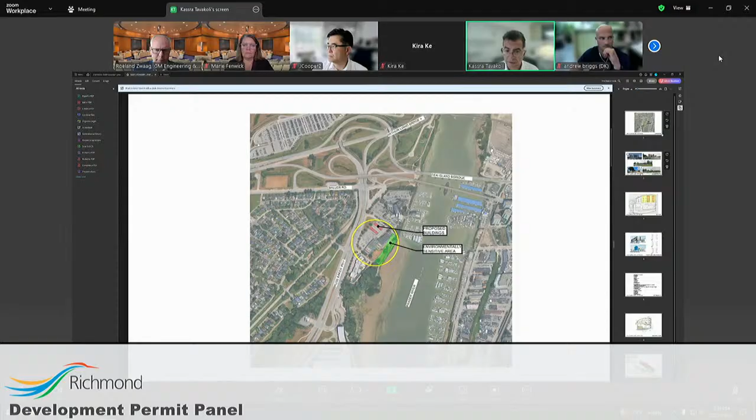So with that, I'm going to the next slide, which shows the context. To the north, you can see at the very top left, an older hotel, a 10-story building in the marina, almost the same era, a little bit older than our building.

To the south is the slide showing the big image on the top right, which is a newer building—a 3-story fitness building with offices, an autism center, daycare facilities, and some parking in front. The center image shows the existing building on our site, a stepping 5-story modern building, and shows the vast parking.

The other thing to notice about this area is that this parking is underused, and studies we'll talk about later show that parking is fairly underused, creating the opportunity to take this area in the middle for a new building.

To the east of the site is the Fraser River and its banking. Most of what's shown in the bottom left image is the environmentally sensitive area, with a public pathway that's continuous between the neighboring buildings, and a future dike running along here, which the trees indicate the location of.

The bottom right image shows the context to the west, which is Russ Baker Way, heavily trafficked, and across from that, hardly visible because of the trees, is the Burkeville neighborhood, which is single families.

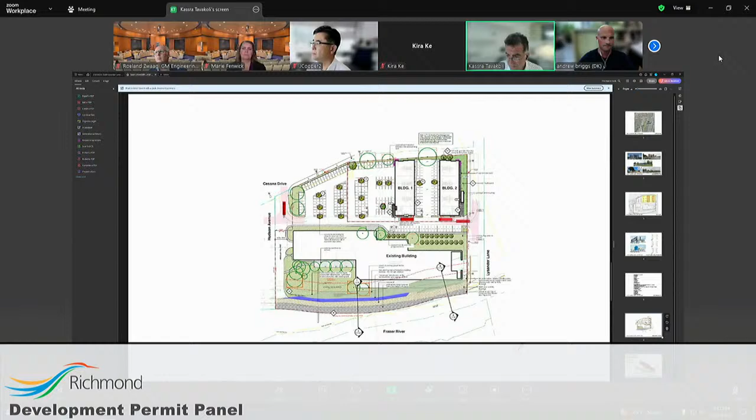Hi everyone, my name is Thibaut Doua with ROE Environmental. I'll walk you through the environmental assessment. What you're seeing in the green hatch box is the environmentally sensitive area associated with the Fraser River shoreline. That's about 60 meters total, 30 meters on either side of the natural boundary of the Fraser River.

What you're seeing in pink is the area of the dike that will not be restored. It's going to stay as riprap because you can't have any planting there. And in gray is the multi-use path. The existing habitat in the area is mainly a maintained lawn with a few remaining planted trees, so there's not really any good riparian habitat that was present to begin with.

In terms of species present and species at risk, we didn't identify any potential species at risk that could frequent the area either during or following construction of the dike. We did a review on site for the potential presence of bald eagle nests, which is a major thing we need to consider, and the closest one is over 130 meters away, so there wouldn't be any potential for disturbance during construction.

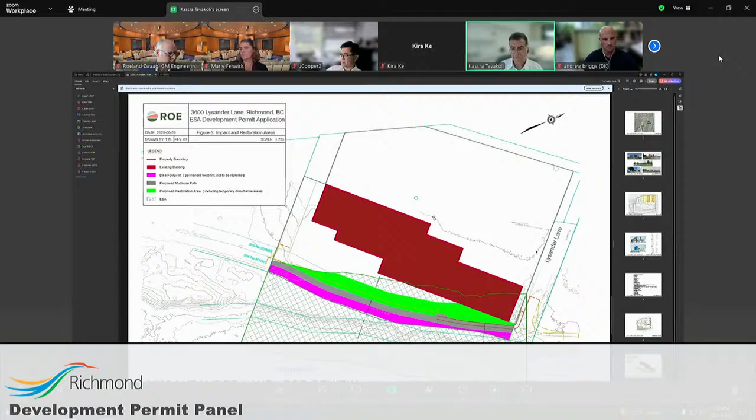In terms of subdivision, there's no real impact on the environment for the lot that's to the north, because it's currently just developed. That's all I have for this environmental slide.

Good afternoon, everyone. My name is Aaron Chen, the traffic consultant for this development. We conducted a traffic impact assessment to this proposed development.

Due to the estimated traffic volume generated from the proposed development in Lot B being only 18 vehicles per hour, the traffic impact from this proposed development to the adjacent road network, we believe, is insignificant.

The existing building in the subdivision Lot A is seeking a parking variance. We conducted a parking accumulation survey on Thursday, January 16, 2025, and found that the highest parking demand for the existing building is 117 vehicles, happening at 11 a.m.

So total parking provision on the site will be 151 spaces, not including the parking spaces provided in Lot B. We believe that the proposed parking supply is still sufficient.

To further reduce the parking demand and support the parking variance, the applicant is proposing a transportation demand management plan, such as providing shared parking, 1 year of 2-zone monthly transit passes, shuttle bus program, end of trip facility, enhanced parking, and enhanced bicycle parking and car sharing. That's it for us.

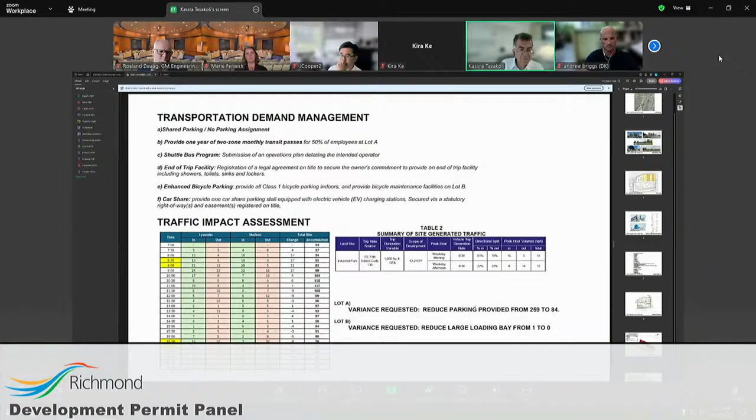Yes, thank you, Mr. Chair. Staff have a couple of comments, if I may. The applicant, as you just said, addressed the 2 parking variances. So all I would have to mention is just to repeat that the applicant is providing a package of TDM measures, including 1 year 2-zone monthly transit passes, a shuttle bus program for a period of 5 years, and

end of trip facilities, Class 1 bike parking and maintenance facilities, and 1 car share parking space on Lot B with EV charging. The proposed variances have been reviewed by the city's transportation team. They've looked at the transportation impact assessment and transportation demand management measures proposed and are supportive.

In addition, the proposed developments will include dike design and construction across the length of the foreshore, up to a dike elevation of 4.7 GSC, and this dike design and construction will also take into account the ultimate future dike elevation of 5.5 meters.

The applicant will also be reconstructing the dike trail on top of the reconstructed dike with a minimum width of 5 meters. It's also worth noting, Mr. Chair, that the applicant will be retaining and protecting 20 on-site trees and also providing 37 replacement trees, which represents a net increase in on-site trees on the subject site.

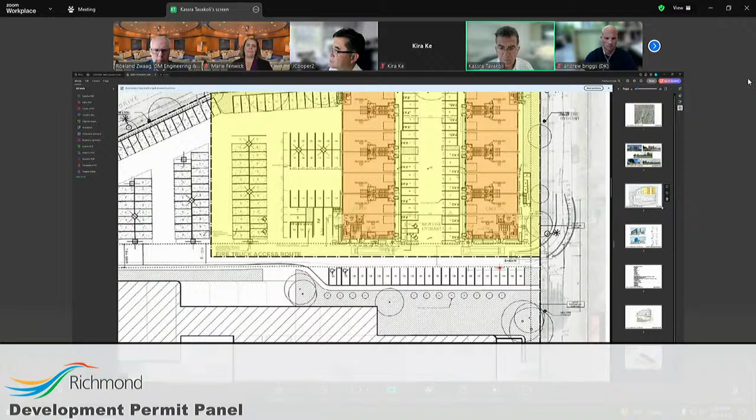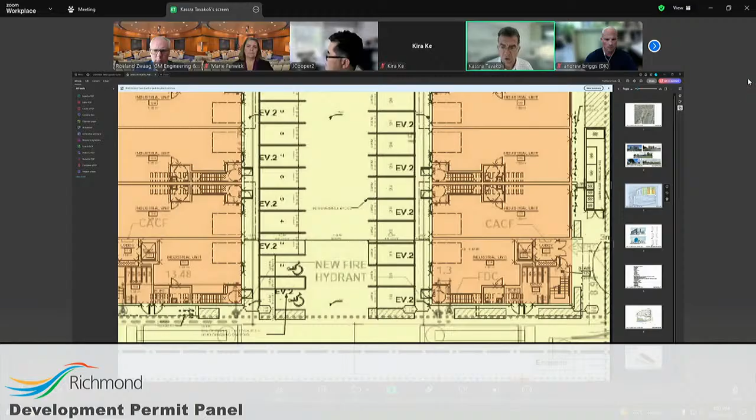As you can see here, there's parking. Ground level is accessed by, let me zoom in. There's parking, then a 5-foot wide sidewalk, then these garage doors and entry doors. The entry door comes into a vestibule that opens to the space on the ground floor and continues further up to the 2nd floor. The 2nd floor of all these units is only served by the stair.

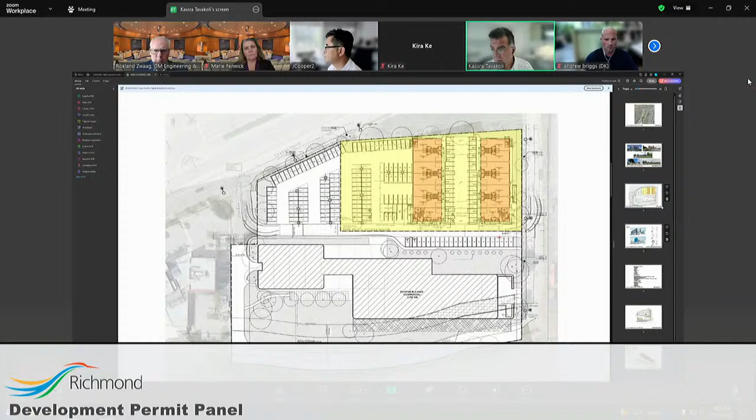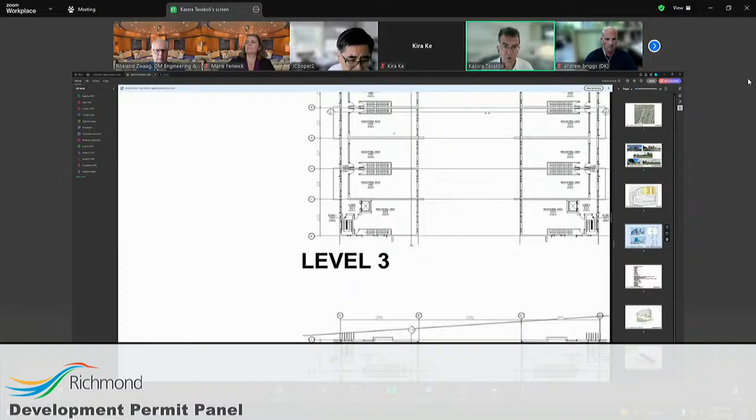The 3rd floor, however, if I go to the next slide and zoom in, as you come in you arrive in this kind of corridor that serves every individual unit, and you can see these stairs are potential stairs. They may not be built if units are sold separately. They're just potentially there. Sorry.

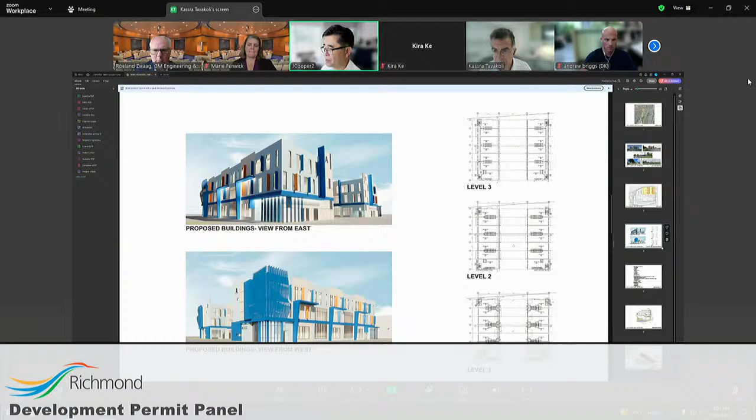Yeah, I think we'll have a discussion at building permit time. This is not the right time for it in terms of accessibility, but these are discussions we can have at building permit stage and not at DP stage. But it does bring into question for me a statement of universal design if both floors of the ground-oriented units are not accessible. But we can talk about that at building permit stage.

Sure. Okay, Marie, anything else? No. The only thing I'd like to comment on, I appreciate the modern design, and I think there's a great opportunity to improve the site with respect to greenery and landscaping, which is commendable. Similar to the panel, I'm also curious what happens in the transition between the new dike and some of the existing features. I think we'll have to rely on the design process undertaken by the qualified engineer to go through that, and I'm looking forward to reviewing those drawings as they progress through their approval process with the Inspector of Dikes.

So with that in mind, is any of the panel members willing to move the director's recommendation as previously outlined? I'll move the recommendation. Okay, Marie first. Any seconder? Second. James, okay. Any more questions? No? All those in favor? All right, that was carried. So thank you, gentlemen. Your DP has been approved. It will be forwarded to council when appropriate. So thank you so much.

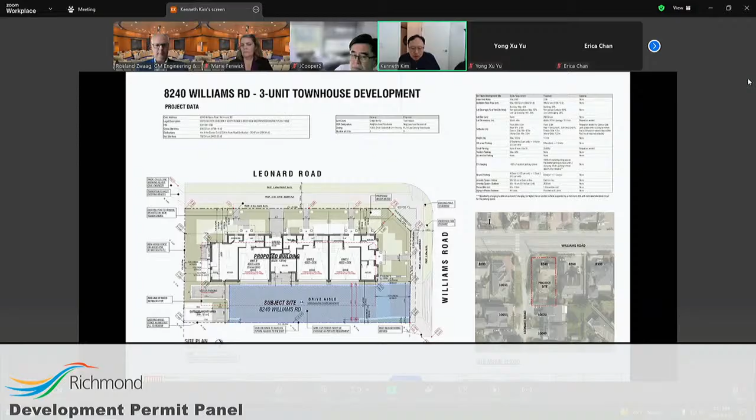Previously mentioned at 8240 Williams Road, this is a small three-unit development proposal located at the southeast quadrant of Williams Road and Leonard Road, about 200 meters east of Number 3 Road. Each of the 3 units will have 4 bedrooms plus den, and the floor area for each unit will be around 1,600 square feet. The goal here is to provide adequately spacious and livable homes for the average townhouse buyer.

This site has a bit of history. The previous owner first started looking into a townhouse project back in 2019, like 6 years ago. It went through a couple of different iterations, like a 2-building scheme, and our team, Kenneth Kim Architecture, took over and submitted the rezoning application in 2021. One of the biggest challenges from the start has been the lot size. It's only half the width of what's typically required for townhouse zoning.

The bylaw calls for a minimum 40-meter frontage. This is just under 20 meters. Both the former developer and the current owner have tried to purchase the neighboring property to assemble a bigger site frontage. It's just been simply impossible. They weren't responding, and eventually they made it clear that they're simply not interested.

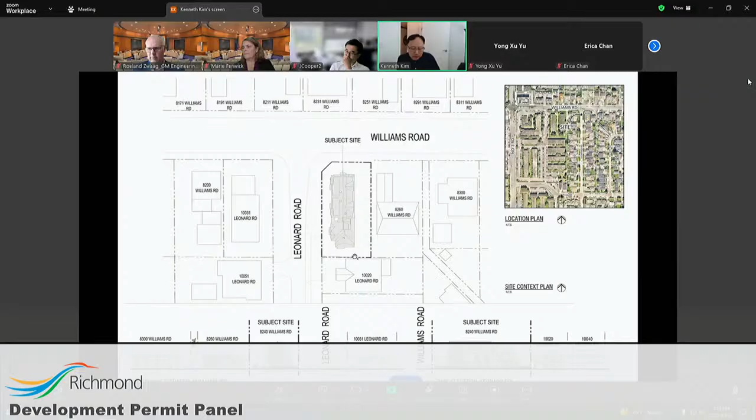So rather than leaving the land underused, we're proposing a design that works now, but also we're proposing to set the stage for the neighboring site to be developed later. We're treating this as the first half of a future larger townhouse project. That means we're including infrastructure now that can support the other half in the future—things like the full-width driveway, a fire hydrant, and half of the required outdoor amenity space. When the lot next door is ready to go, it can tie into our development seamlessly.

Because the lot is so narrow, we had to be very strategic about the layout. The east side is where the driveway goes, adjacent to the future development, which will be shared by the adjacent lot. On the other 3 sides: to the north is the arterial road, Williams Road; to the south is the existing single family; and to the west is Leonard, with another single family across the street.

And so we are on the arterial road, we're sticking with the fully required 6-meter setback, and that leaves—so after all the setbacks and driveway, it leaves us with a very tight footprint. On the first floor, most of the building area is taken up by the garages. Each unit has two parking spaces, and the rest of the first floor area is taken up by very little habitable space, except for unit 3, which is convertible for future accessibility.

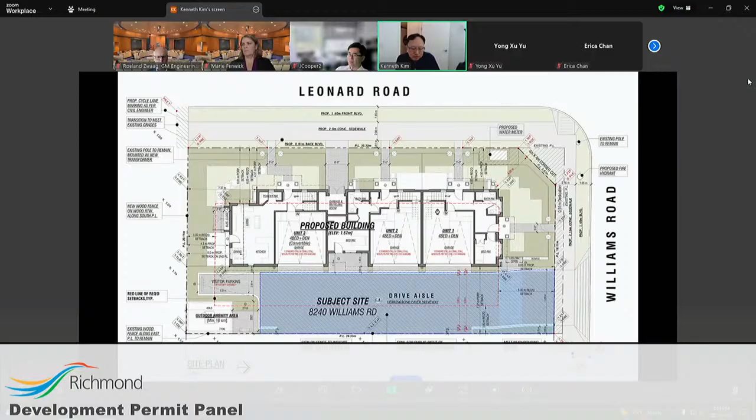And looking at the building levels, the first floor has just been described. On the second floor, units 1 and 2 will have their main living areas, and unit 3 will have its bedrooms. The third floor for units 1 and 2 will have 3 bedrooms each, and a loft style bedroom for unit 3. What this does is create a stepped form.

Units 1 and 2 facing Williams Road look like typical 2.5-story townhomes. Unit 3, adjacent to the neighboring single family to the south, is scaled down to better fit within that context. We also pulled back the walls on the top floor and tweaked the roof design to bring the height down on the south side, so the building feels more like a 2-story building.

In terms of architectural form and character, we're proposing a traditional townhouse look with pitched roofs and a mix of textures. You'll see materials like brick veneer, board and batten cladding, and Hardie panel accents on the bay windows and roof gables. The colors are neutral and earthy, nothing too bright or flashy, so the building blends well within the existing context. It's not a luxury, flashy building, since this is meant for an average market, but we've made sure the homes are well equipped.

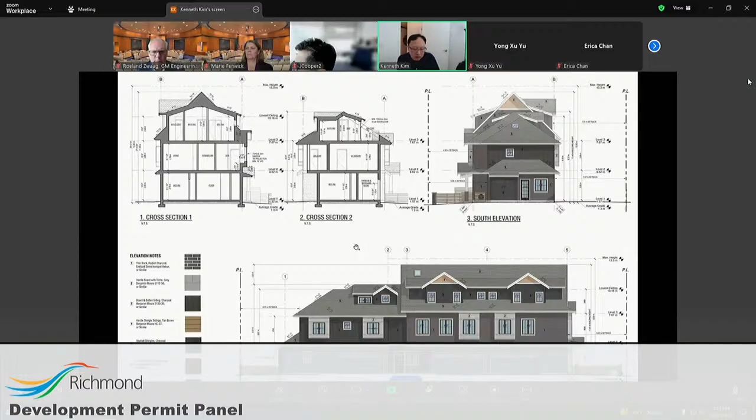The units are designed with aging in place in mind, and Unit 3 is convertible for future accessibility. Every parking stall will have EV charging capability, and the homes will meet the latest energy efficiency standards, including individual heat pumps for heating and cooling.

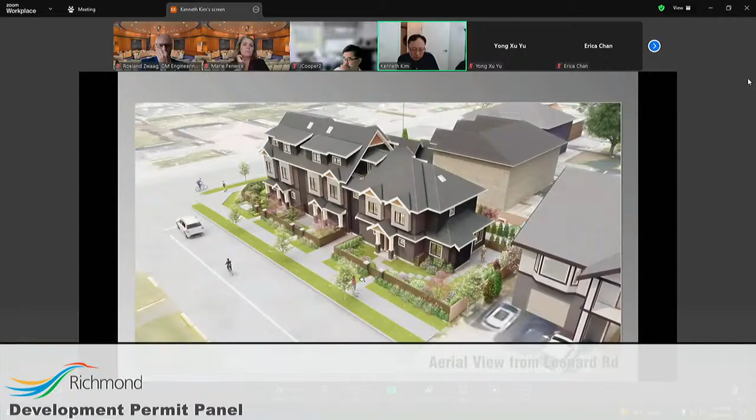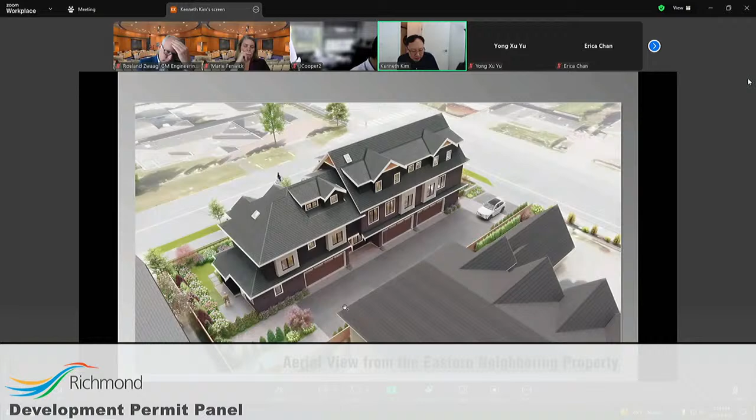From the safety and security perspective, this proposal works very well. There's only one building housing the 3 units, and it's very visible from all sides with no deep nooks and crannies. The east side has a shared driveway and amenity area. The other 3 sides are private yards, each clearly separated with fences and gates.

The whole site will be well lit at night. We're adding downlights as well as bollard lights at key spots like mailboxes and shared outdoor spaces.

In summary, this project is a very livable, forward-looking townhouse proposal that works within the limitations of a very narrow site, but also prepares for future growth next door. We believe this will add new family-oriented housing in a respectful, low-impact way with strong attention to livability, sustainability, and context. Thank you very much for your time.

The next presentation will be by the landscape architect.

Hello, my name is Yong Xu Yu. I'm going to walk you through the landscape design. This project has a very tight space. You can see most of the space is occupied by the driveway, and we managed to fit in a children's play area, the green at the corner, with a playhouse, benches around, and a big shade tree.

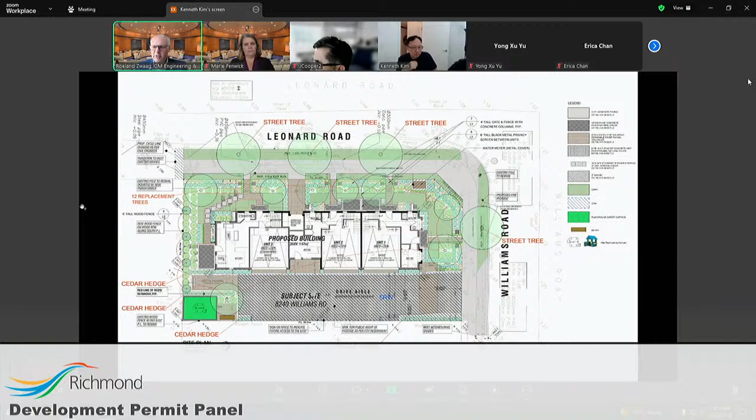Thank you. Ken, is that the end of the presentation? Is there anybody else of your team who's presenting?

That's it. So in summary, if I may repeat, we believe this will be a very practical, livable, and forward-looking townhouse development that works within the limitations of this very narrow, challenging site. And it does prepare for future growth next door. It's family-oriented in a respectful, low-impact way with strong attention to livability, sustainability, and context. Thank you very much. Look forward to your questions.

All right, thank you. Any staff comments? Andrew? Thank you, Mr. Chair.

I don't wish to repeat what the applicants just outlined to the panel, but I would like to address a couple of points. Firstly, there is a concurrent rezoning, which is at third reading at the moment. During the process of that rezoning, no public concerns about the proposal have been provided. In relation to the variances outlined, they do support site functionality, meet OCP design guidelines, and the shared access over the drive aisle provides for future access to the neighbouring property should that redevelop in the future.